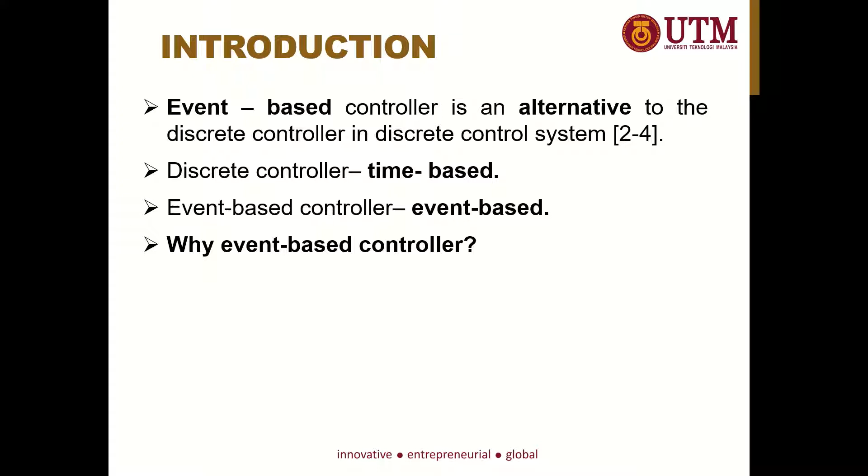The question is why we need event-based controller. Whether we realize it or not, we are in the era of Industrial Revolution 4.0 and Internet of Things. Most of the systems now are controlled by a computer or embedded system. If we treat this kind of controller as a cyber controller, while the actuator and plants are physical, now we are dealing with a cyber physical system. However, most of the controllers that we have now only focus on the physical part. We don't really care and take into account how much the computational cost is in our control system.

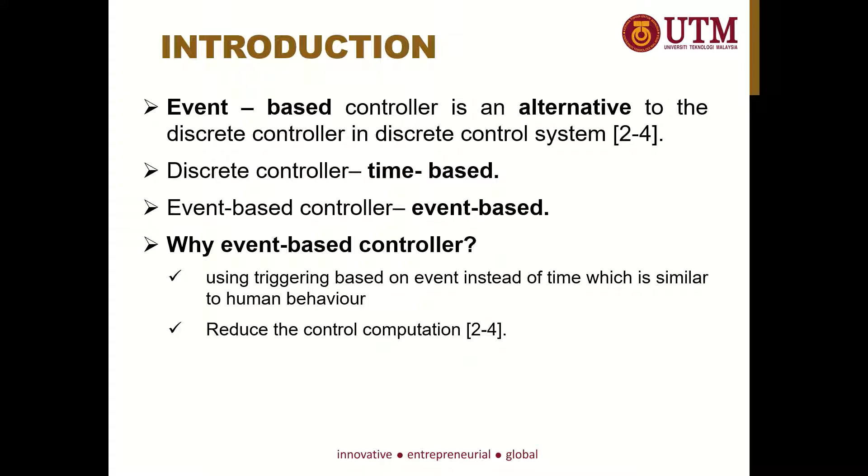For this reason, event-based controller can be a solution based on its capability to behave like human behavior, where it's triggered based on event. This kind of triggering will give less triggering, which means less update and eventually less computational cost.

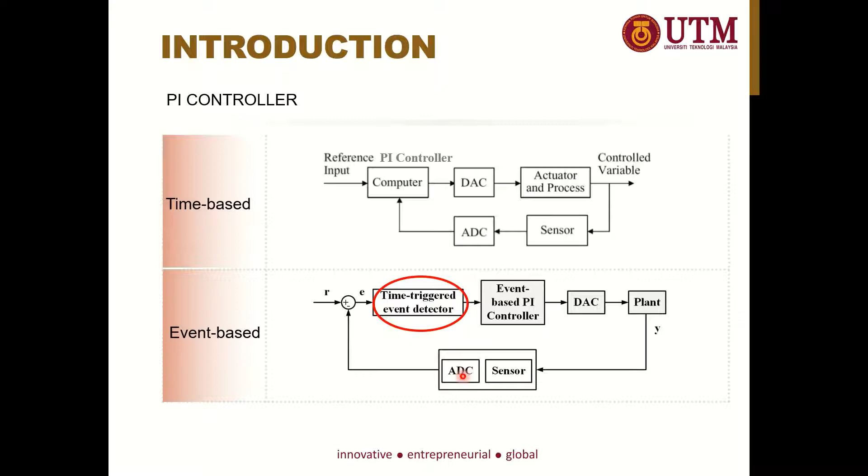Now I will focus on the implementation of event-based PI controller. Firstly, we have a basic setup of PI controller in discrete control system. And now this is the setup for event-based PI controller, where there is an additional block for the event detector to detect the event before the controller can update the control input. In this strategy, sensor sampling and event detector are still in time-based manner.

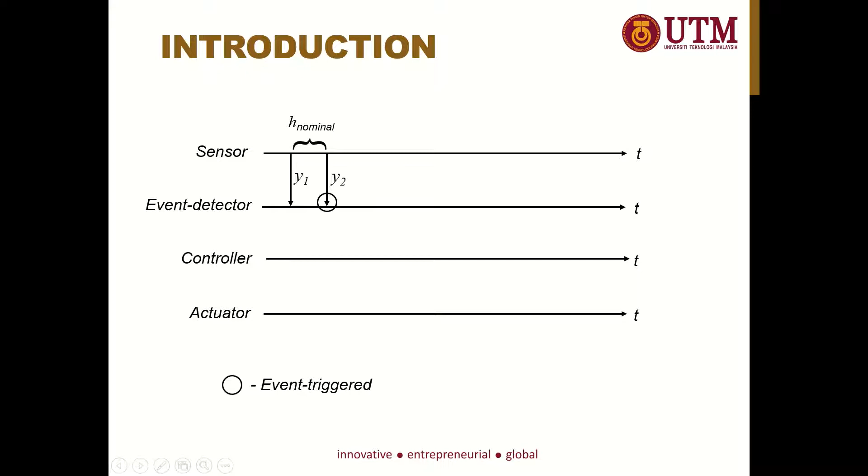Here I will show the sequence of the event-based controller in updating the control input. First, the sensor will sample the output and the sampled output will be evaluated by the event detector. Let's say there is no event at the first sampling, so the controller will not compute any update to the actuator. Then after a certain amount of time, equivalent to H nominal, which is a sampling period in discrete controller, the output is sampled again, and this time the event is detected. Thus, the controller will give a new update to the actuator.

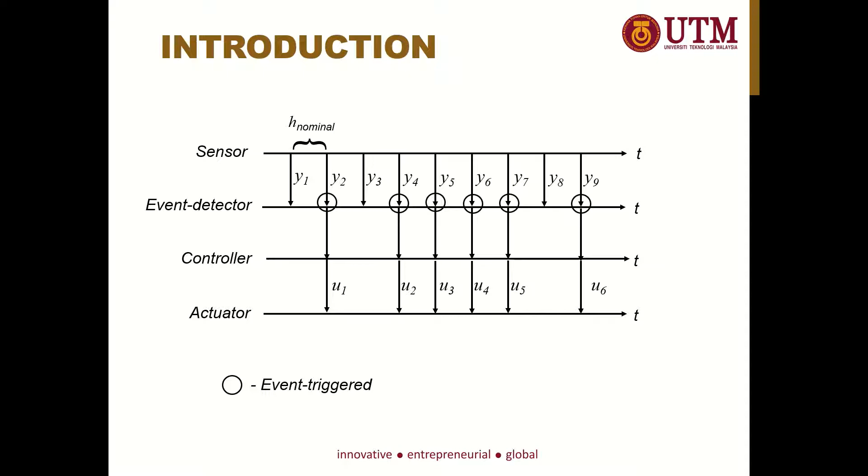The same process goes for the next sampling and it is repeated periodically. In this example, the sensor is sampling 9 times while the controller is only computing 6 times. This is how the event-based controller reduces the control computation.

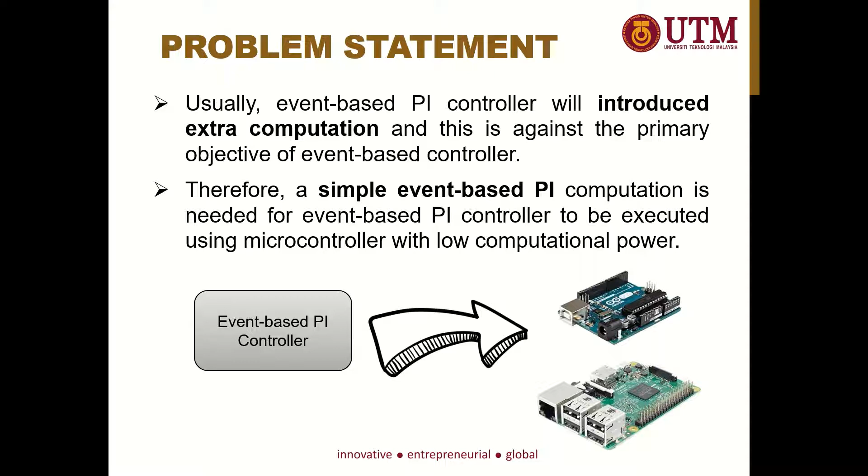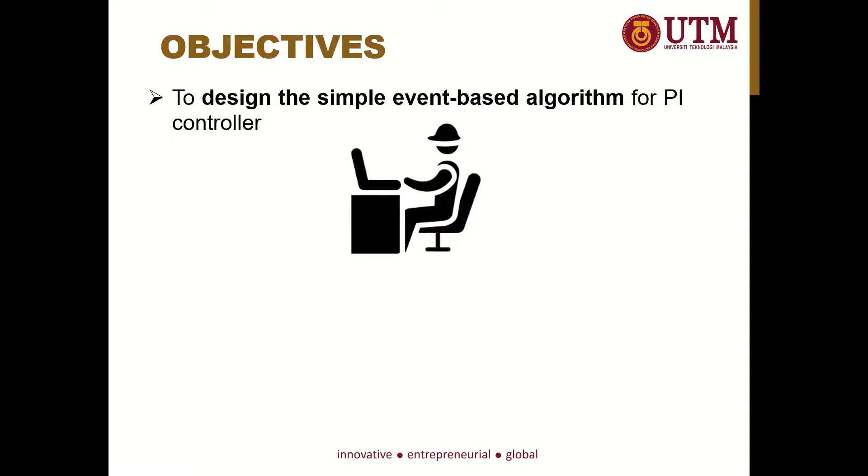The problem now is usually event-based PI controller will introduce extra computation, and this is against their primary objective to reduce the computation. Therefore, a simple event-based PI computation is needed for event-based PI controller to be executed using a microcontroller with a low computational power. Therefore, we set the objective for this study to design a simple event-based algorithm for PI controller, and we want to test the performance of the proposed algorithm.

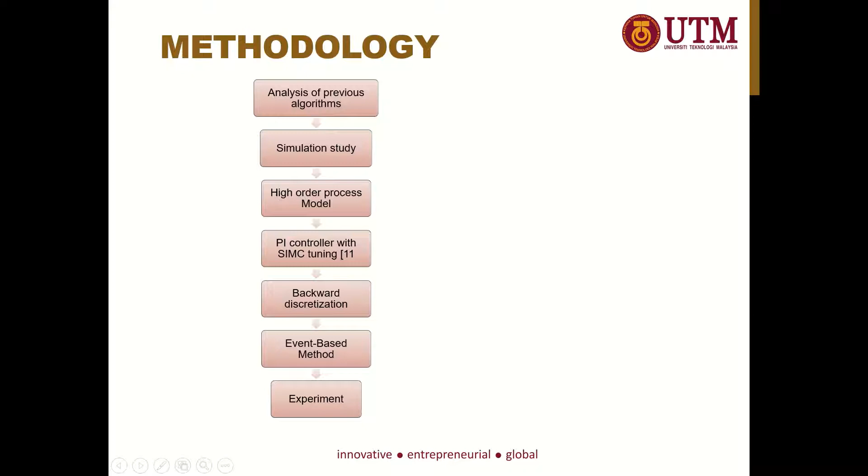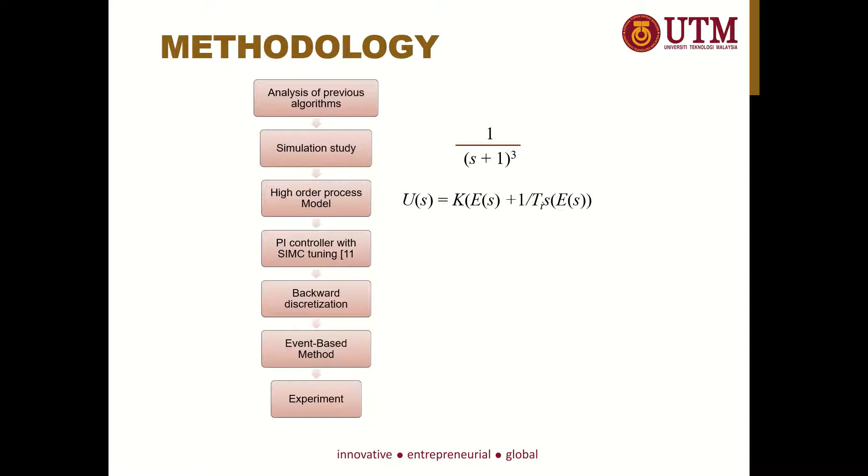In achieving the objectives, we set the methodology as below. Firstly, we analyzed previous event-based PI algorithms. Then we did a simulation study on the high-order process model, and by using SIMC tuning rule, we tuned the PI controller gain. Next, the controller is discretized using a backward discretization. Note at the integral discretization part, there is an effect of H, which is the sampling period.

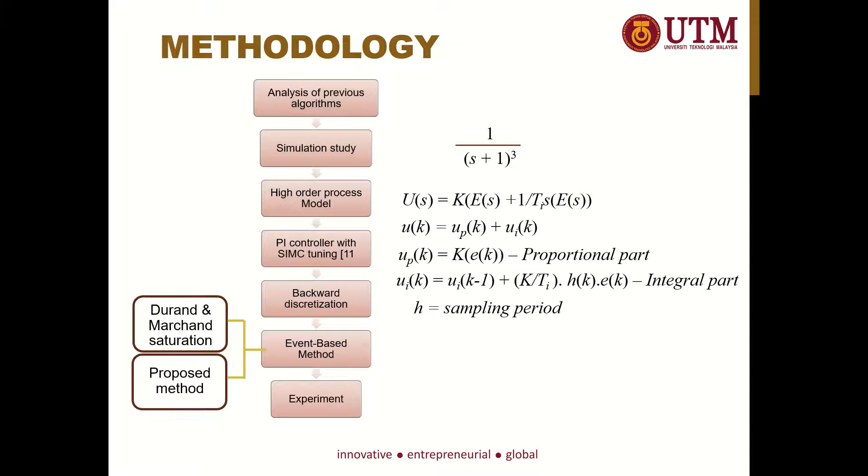After the discretization, we implement the event-based saturation algorithm by Durand and Marchand and our proposed improved event-based algorithm. In order to investigate the effectiveness of our improved algorithm, experiments on varying sampling period and error limit are conducted for two benchmarks, which are set point change and disturbance rejection.

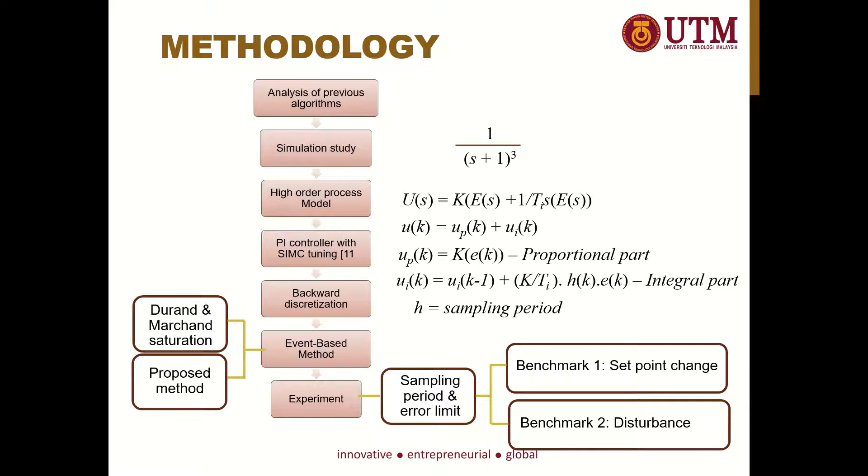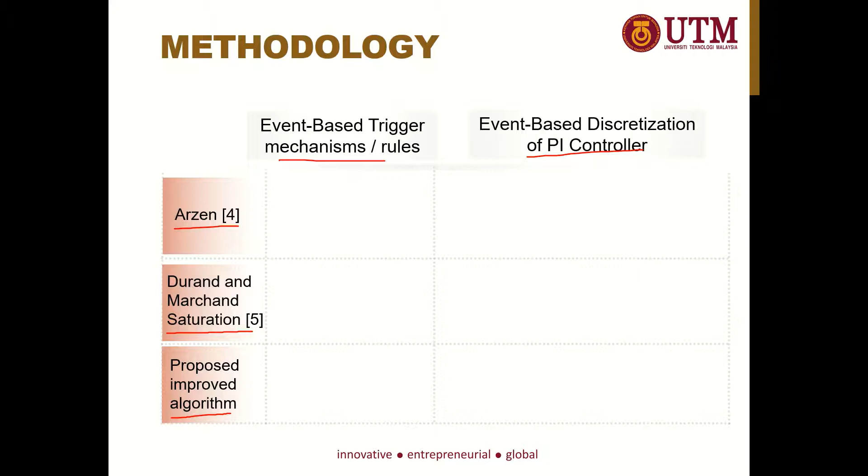In this slide, I will explain the comparison between the original event-based algorithm by Arzen, the saturation algorithm by Durand and Marchand, and our improved algorithm. The comparison is in terms of event trigger mechanism and integral discretization. Event-based has an event trigger mechanism used by the event detector to decide an event. Arzen used a delta error with a safety limit Hmax, where Hmax is the maximum time the system goes without a control update. For the discretization, he used a forward discretization method.

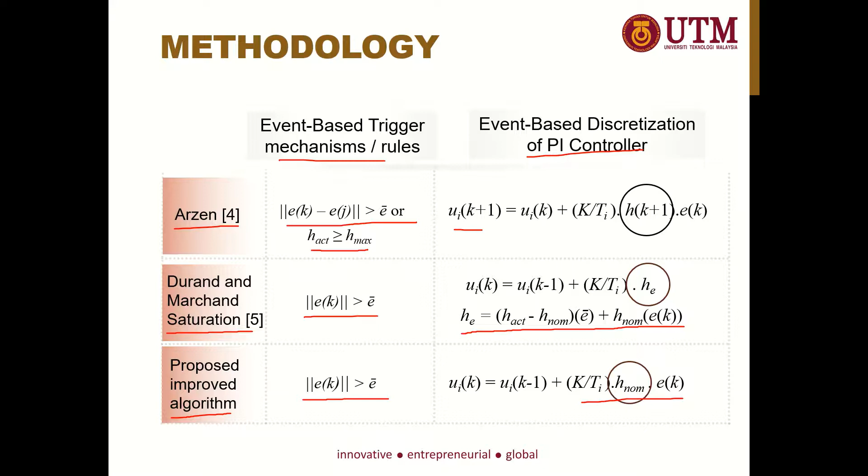In the saturation algorithm, Durand and Marchand use only absolute error for their event trigger mechanism. They remove the safety limit to reduce more control updates. However, they need to deal with a large overshoot in the system if the controller is not updating for a long period of time. For that reason, they introduce saturation to reduce the overshoot. In our proposed improved algorithm, we use the same event trigger mechanism as the saturation algorithm, but for the discretization, we use a fixed h nom equal to the sampling time.

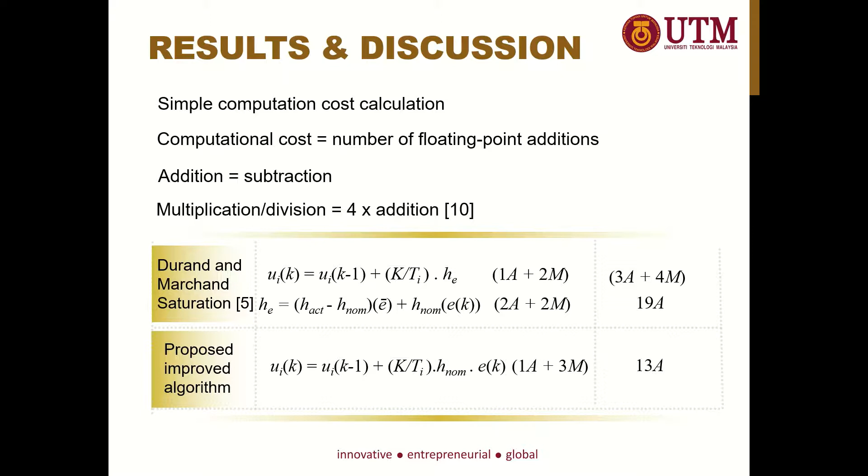For the results and discussion, firstly, we propose a simple computational cost calculation using the number of floating point addition operations. Let's assume addition is equal to subtraction and multiplication is equal to division. According to Horowitz, multiplication is 4 times the cost of addition. Now let's look at the cost of the saturation algorithm by Durand and Marchand as well as our improved algorithm. For the saturation algorithm, the cost is about 19 additions, while our proposed improved algorithm has only 13 additions. This shows that the improved algorithm has less computation.

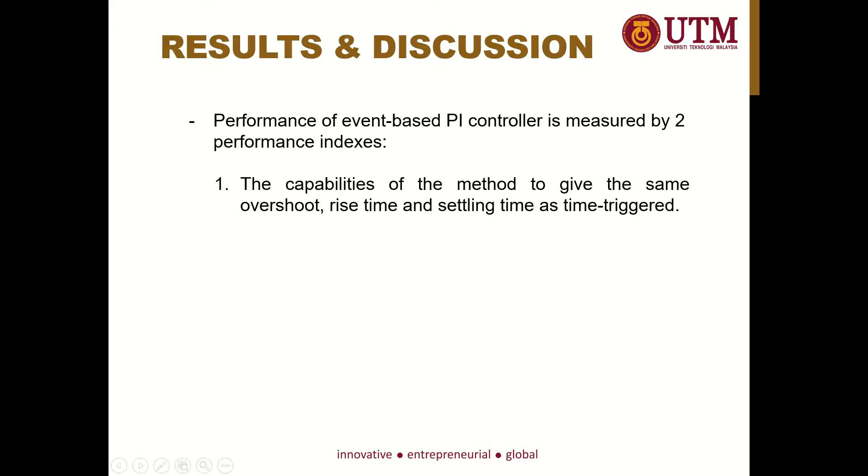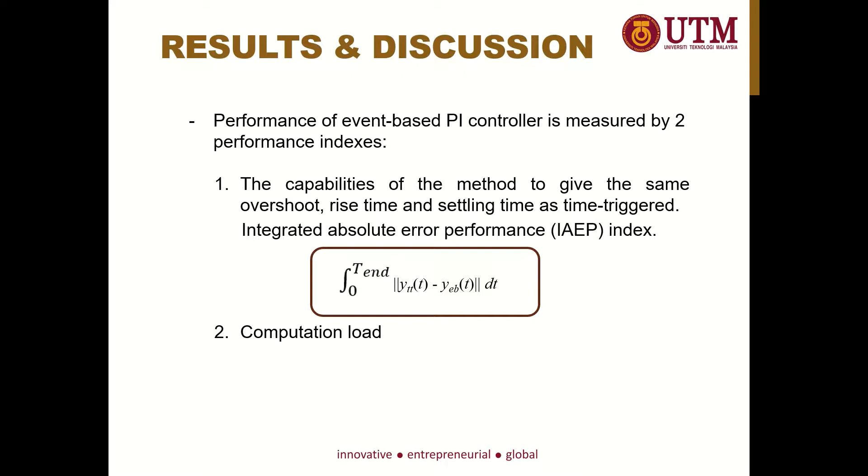In terms of performance, the performance of the event-based PI controller is measured by two performance indices. Firstly, the capability of the method to give the same output response as a time-triggered output response. Thus, we use the integrated absolute error performance index, IAEP, to evaluate how much the output response of event-based differs from the discrete control response. Secondly, we look at computational load, which is the ratio between control updates for event-based compared to discrete control updates.

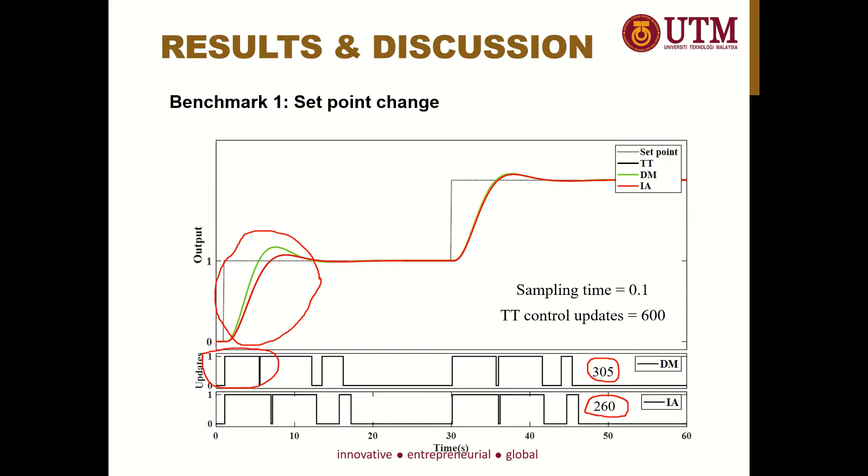Now the red line is the improved algorithm response, which is able to catch up with the time-triggered response with only 260 updates. For the disturbance case, although the saturation algorithm is able to reduce the control updates to 295, there is an overshoot when it tries to react to the disturbance. On the contrary, the improved algorithm managed to handle the disturbance according to the time-triggered response with only 271 control updates.

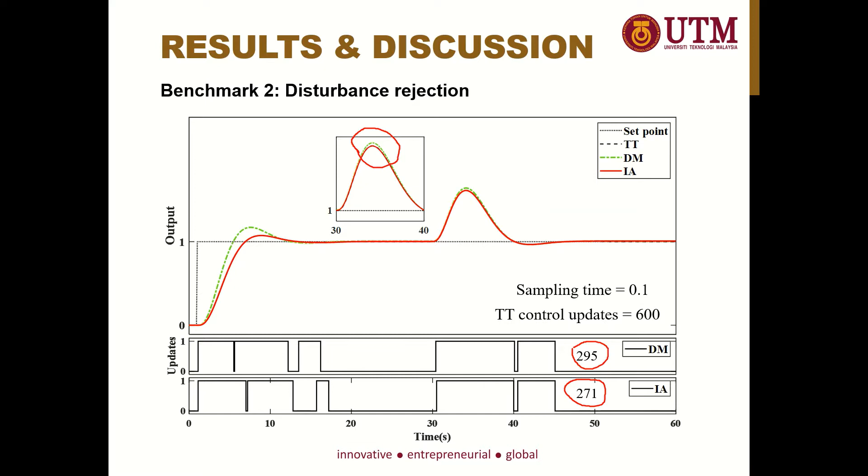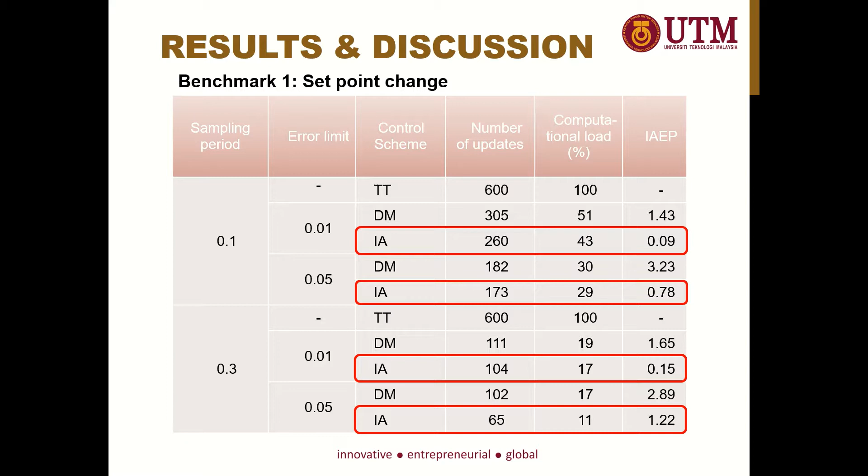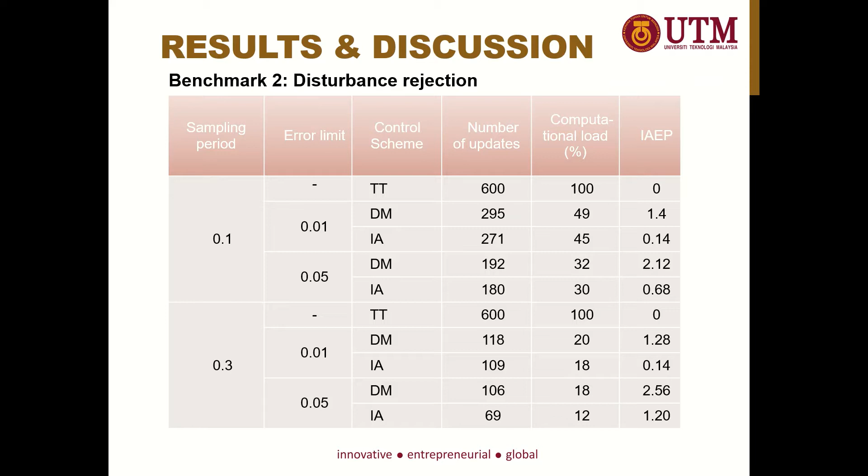Further investigation of the sensitivity toward sampling period and error limit is important in order to find the trade-off between output performance and computational load reduction. For benchmark 1, the improved algorithm managed to outperform the saturation algorithm, consistently producing the lowest IAEP value with the lowest computational load. We find a similar trend in the improved algorithm's performance in the disturbance rejection case, where it has the lowest IAEP and computational load for any sampling period and error limit.